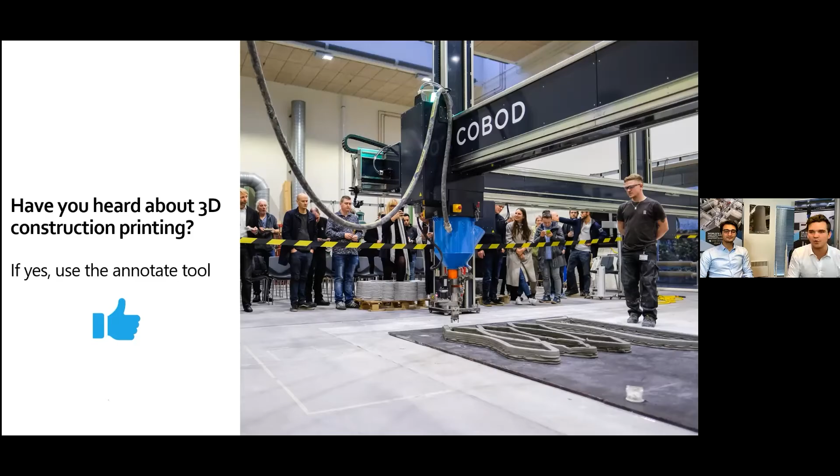Today we're going to show you more about how this technology is actually evolving. Before we get going, I would just like to show you a video of that. This is a project done by our partner, PERI Group. PERI is the minority investor, and they did this in Germany. Let's go.

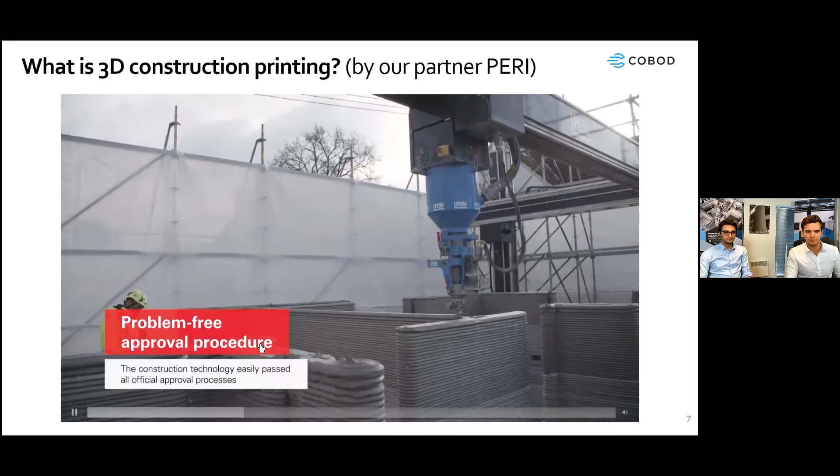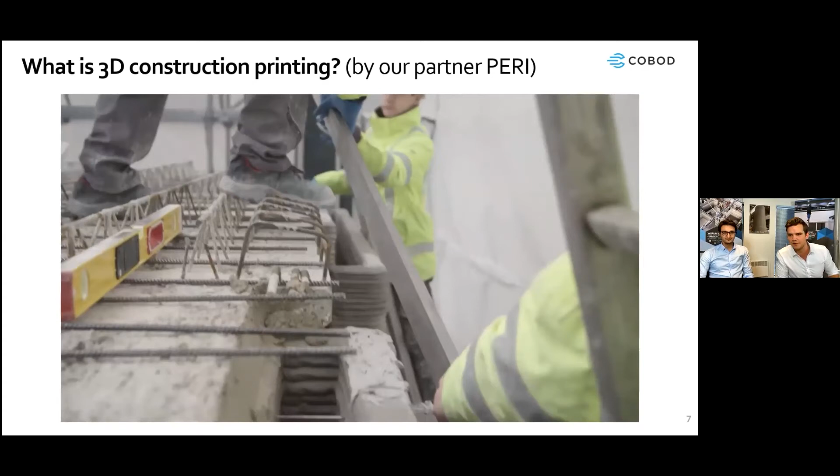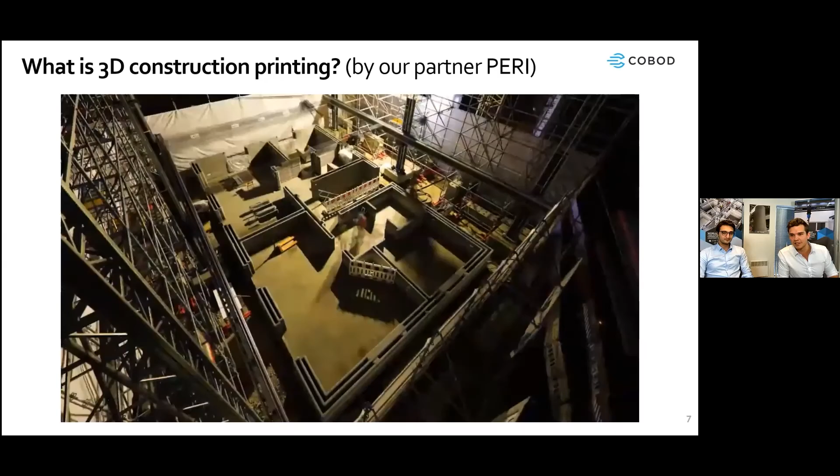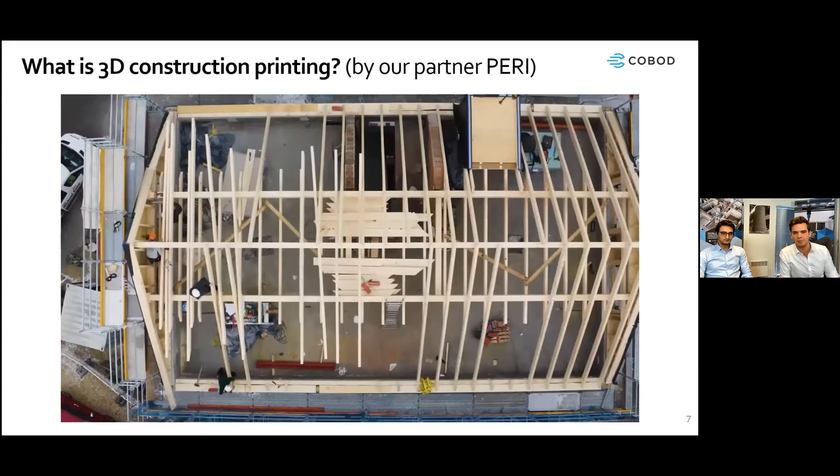I think we have some potential sound issues from the video here, so I'll just go ahead and voice it over. Again, what you're looking at is a very large building, around 400 square meters, that's around just over 4,000 square feet, being printed in Germany using a COBOD BOD2 3D printer. You can see here how the concrete is actually getting extruded through the print nozzle, which allows you to stack layers of concrete on top of each other to give you the walls of that building. And now here at the end, what you see is the additional contracting work that comes in to finalize the building. So a big thank you to PERI for sharing this video with us. Quite impressive, even for me who has worked here for a while now.

In terms of what 3D construction printing is being used for, there's a lot of use cases being developed these years, and I think we will only see more in the future. We've seen it used for residential housing, for schools, which we did - we'll see that in a moment - for wind turbines, also you'll see that in a moment. We've seen it used for bridges, in the military, for commercial use, etc. And we're just at the beginning of this story here. We will see many more applications being developed in the future.

Now, contrary to popular belief, 3D construction printing is not addressing all costs or all elements of traditional construction. That's what we've tried to highlight on the right-hand side. If we look at a residential housing project, best case, the 3D construction printing technology would make up maybe 45% of the total elements and total cost. You use around 10% for the foundation and slabs, then around a third for the raw house structure - that might be smaller than that. But then there's still a lot of other work which, as of now, you cannot do with a 3D construction printer. Maybe that will come in the future. At least that's something we're working on.

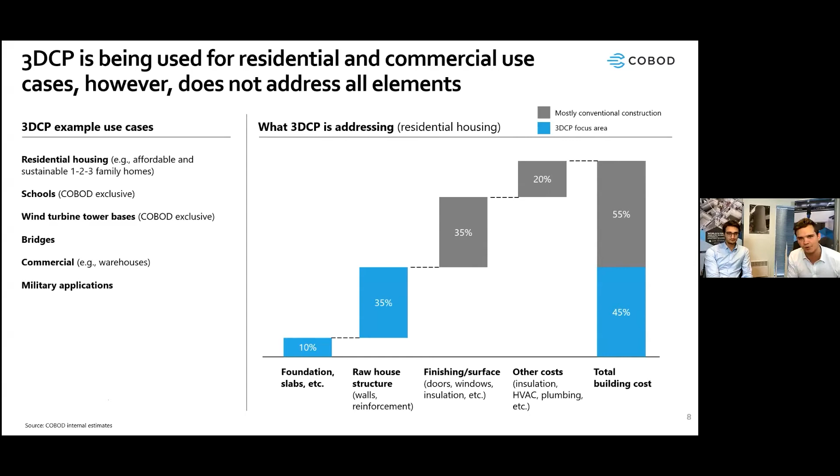So we always try to be very transparent here at COBOD in terms of setting expectations right. Now, just in terms of what's happening within 3D construction printing, well, it's growing a lot. I would say there are still no good global sales numbers that are trustworthy. We have ours, and we make up a very large chunk of the industry.

However, these are just numbers of companies — with regards to success, or how many have actually done proof of concept or deployed printers, the number is much, much lower. And in all humbleness, COBOD is likely the leader in that aspect. But strong growth here, and it'll only continue in the future. We're 100% certain of that.

Now, that was a bit about the status of 3D construction printing as it is right now. And I think we'd now like to switch gears to say, why are we actually seeing this? What are the benefits of 3D construction printing?

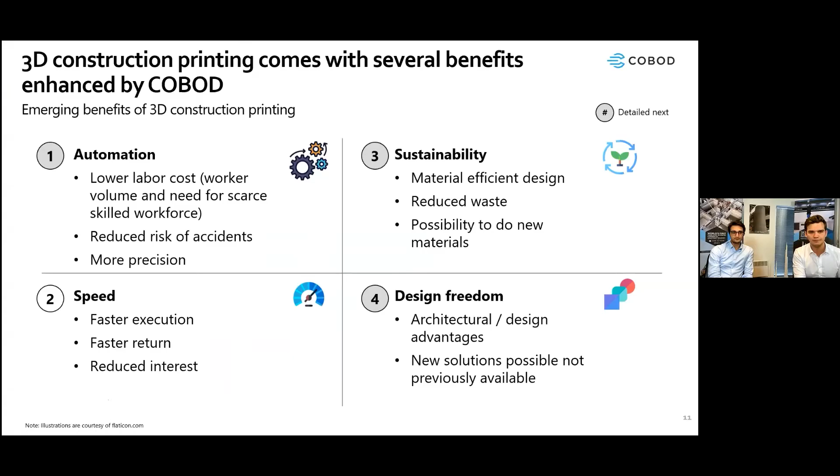In general, in the world, there is an urgent need for automating manual labor in the construction industry. There are several reasons for this, which you've likely stumbled upon in recent years, even if you're not in the construction industry. One is that the construction industry itself is not very digitized or automated. U.S. estimates say that around 50% of activities in conventional construction can actually be automated.

Secondly, there is a lack of skilled labor in the industry — we actually need good skilled hands on site, which automation, of course, can replace some of. Thirdly, there's been an increase in material prices for the industry. Steel and lumber are great examples of materials that have risen tremendously in recent years, which drives a further need to minimize cost.

And then number four, also very important, affordable housing. This is something we hear from at least half of all our customers — they want to do affordable and sustainable housing. So we see these four main drivers as reasons for why this technology now, despite having existed for several decades, is seeing a rise in adoption.

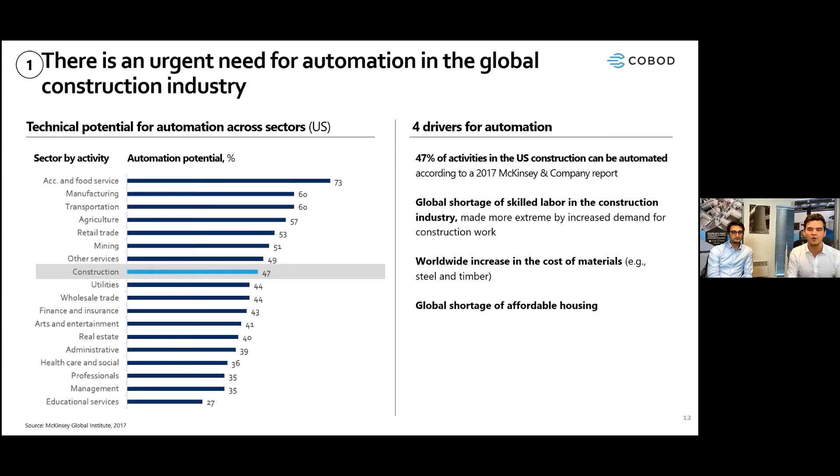Just speaking a bit more on the savings from 3D printing — maybe this is your domain, I'd say. Basically, because of the aspect of automation, using the 3D printer to automate the construction itself, the gain you have is complexity for almost no extra cost. So if you compare a flat wall with conventional construction versus 3D concrete printing, you end up with a factor of 1.

If you have a structure with one axis of curvature, you'd have a factor of 2. Of course, most of you are probably coming from a construction background, so you know the cost of a small curve would cost a lot in formwork, a lot in finishing, and so on — that doesn't happen with 3D printing. It's as simple as a digital file going to the 3D printer, and the printer does the work. The same case goes for a structure with two axes — of course, this is more complex.

And it's not about only the complexity, it's about finding the right people to actually do this. And because these people are also very exclusive and limited in their skills and time, that means there's kind of an extra margin or extra cost that's going to happen. Well, that doesn't really happen when you're using the technology of 3D concrete printing.

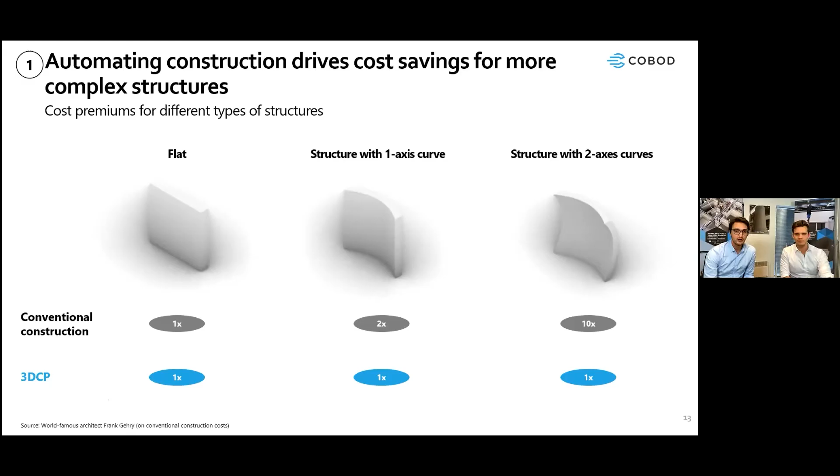So going on more into what happens in construction, why 3D printing is interesting, why it will improve sustainability. The first thing is you will have less waste, printing only what is needed without cutting or carving of precast elements. This is all that can be taken into consideration while 3D printing.

The same case goes with less reinforcement, eliminating reinforcement in precasted elements that you would use for transport. You have to have some kind of hoisting joists or hoisting points for the reinforced parts. All of that will disappear if you are using 3D printing in situ. And the material efficient design.

Let's zoom out on using this technology. If you are using a 3D printer, that means you can use construction in different ways that you were not allowed to do in conventional methods. This is what we're trying to do here at COBOD, creating knowledge, methods and technologies so that the engineers or architects who work with us change their mindset of how they design buildings. When they do so and activate the powers of this technology, we end up with material efficient designs. As you can see here, we achieved the same areas with different shapes.

By doing so, we reduced the structure by 12% in the use of materials. So again, this is a key point in the transition from conventional to automated construction: the mindset and knowledge that engineers and architects already have, and how they can put in the effort to optimize the use of 3D printing and efficiency in design.

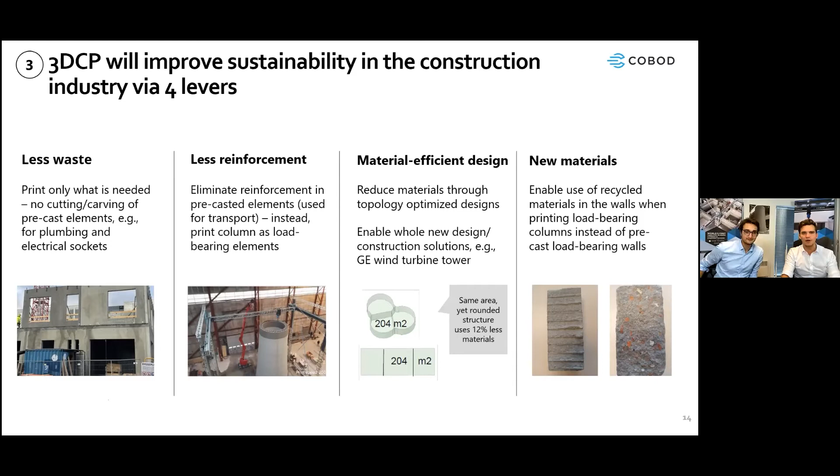So going back to the presentation, that was a bit on sustainability. And then lastly here, another advantage is, of course, the design freedom, right?

Exactly. As we talked about, this is a tool that architects, contractors, and civil engineers cannot, or maybe they're not educated, or let's say not practicing it as it should, because every contractor or architect, when drawing a line or doing anything, has in the back of his head: how are we going to do this, how are we going to achieve it, how much would it cost. And this is the thing we are trying to make all these people break free from this constraint of the box, so think outside of the box and have design freedom.

This is a very famous additive manufacturing case that happened at GE. Basically, this is a fuel jet nozzle; it sprays fuel into jet engines in airplanes. And as you all know, sometimes, and not sometimes, all the time in aviation, weight is money. So as you can see here, this jet fuel nozzle went from 20 parts to be assembled into one 3D printed part.

At that time, 3D printing or additive manufacturing was not as cost effective as using the small parts, but the weight reduction was 25%. So the main cost driver in the airline industry was actually the reduction of weight. You can see the effectiveness of additive manufacturing in this specific case with the GE fuel nozzle. And you can imagine this is one case of many that can take place, not only in manufacturing, but also in construction, engineering, and all different aspects of industry.

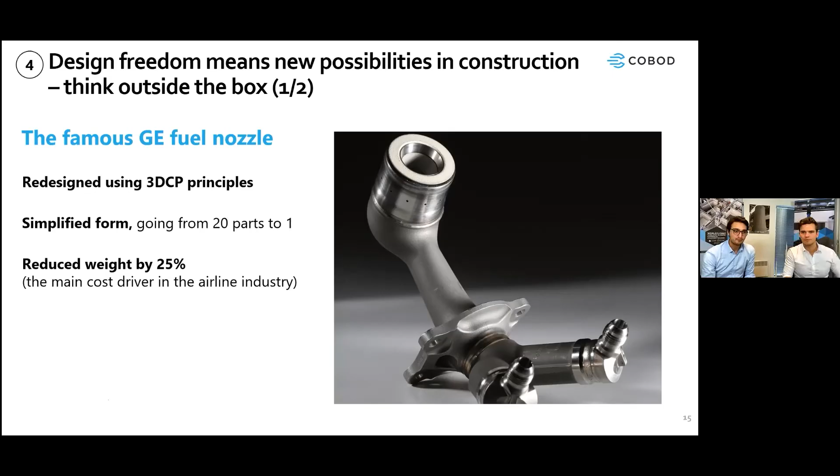Another example, this is a cool one. What happens if the architect or engineer wants to add some kind of aesthetics to the building? The printer is already there, the material is already there. What happens if we can actually do a weaving wall? And what is the cost of this compared to doing it in a conventional method?

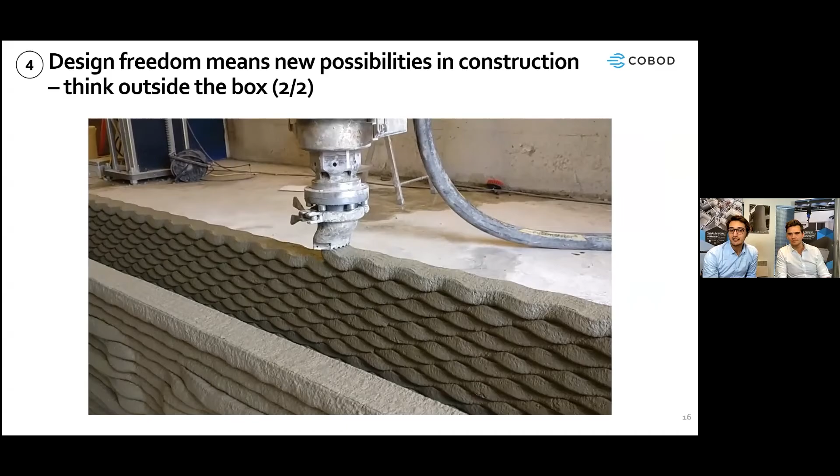Basically, it's extremely hard to do this with a conventional method—let's say if you want to make a mold for that. And that mold will only be used once, while if you have a 3D printer, you can do whatever you want, whenever you want. You can also imagine what happens if you design these patterns to also be load bearing, part of the construction, and so on. And all of this comes for free.

You can see here the consistency of the material, the smoothness of the printer itself, and so on. And on the wall in front, you can see we have our logo, COBOD, which is slightly recessed, appearing from the surface. This was made in 3 or 4 minutes using our own slicer, our own software. So the simplicity of doing these things, the design freedom, it's not just freedom in design, it's the ease of use. These designs were made by interns we had—you can imagine how simple it was to manufacture and do such a thing.

So again, this is where we are standing at the moment, and we're creating knowledge. We're trying to give people access to this knowledge and see how they can activate it and use these case uses in their own projects, in their own environment. So those are, I would say: design freedom, automation, speed, and sustainability. Those are the four main reasons we see for the increased adoption of 3D construction printing.

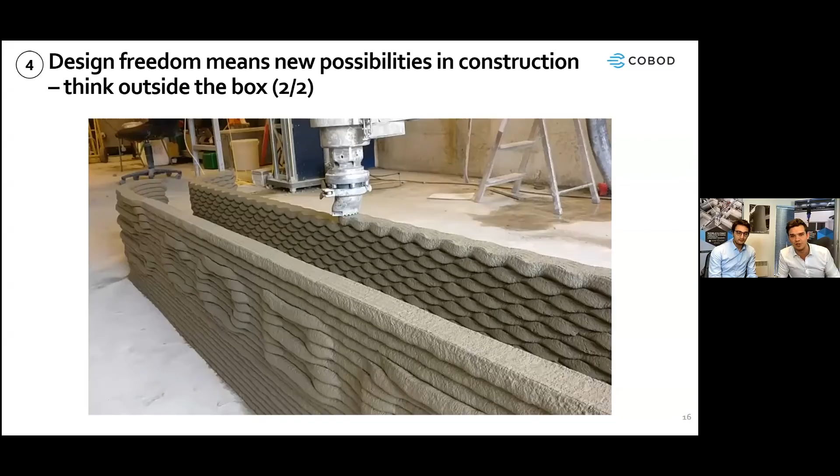Now, this is also very interesting: how do you actually do 3D construction printing?

A lot of pictures and photos have been going around the media with finalized prints for some companies. Some are real, some are maybe mock-ups. But we want to show you some real projects with real people living in real homes, and then discuss briefly how that was actually done.

So maybe you can take us through our printer setup here. As you can see, this is one of the setups of the printers. Let's start by introducing our printers - they are gantry systems, and as you can see, there are 3 axes where the printer can move.

Our printers are modular. When we say modular, that means it is adaptable to the size that you want. If we look at the printer we have on the x-axis, you can see 5 COBOD logos. Each one of these logos consists of a module. So basically this printer is 5 modules, which have a width of 12 meters.

You can deduct or increase that. The same case goes for the length on the y-axis. On the y-axis it's basically unlimited, because you can add more z-towers or z-legs that hold more y-axes, and go unlimited in that direction. On the height, we're at a certain point - right now we're limited to 8, 8.5 meters in height.

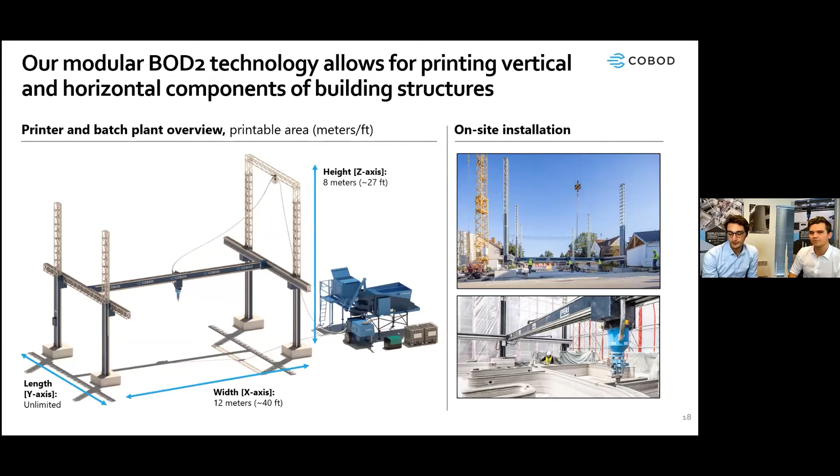On the right hand side, you can see the on-site installation. This was in the States, and another picture down there is one of the projects done in Germany, at PERI. If we go to the next slide.

So basically this is one of the examples of what happened - this is in Beckum in Germany, also by PERI Group. This is a high-end villa, with a touch of luxury, European luxury. It's around 160 square meters in 2 floors, and you can see the print time was around 36 days.

This project was actually one of the benchmarks in the industry, as it's reasonably sized compared to projects all around the world. It's around 1,700 square feet. Compared to other projects you've seen on the landscape, this is 2 floors, fully functional, fully permitted. It's a beautiful house - we asked a lot of people if they would like to live in a house like that, and more than 95 to 98% said yes.

But if you compare this project to other smaller 3D printed projects, of which there aren't many, you'd see this would win more votes than other projects because of the size, the technology, the looks, and of course a big credit goes to the hard work in Germany through permitting, the architect who designed it, the other contractors who did other trades, and German engineering in general. They're spot on - you can see this project was well done.

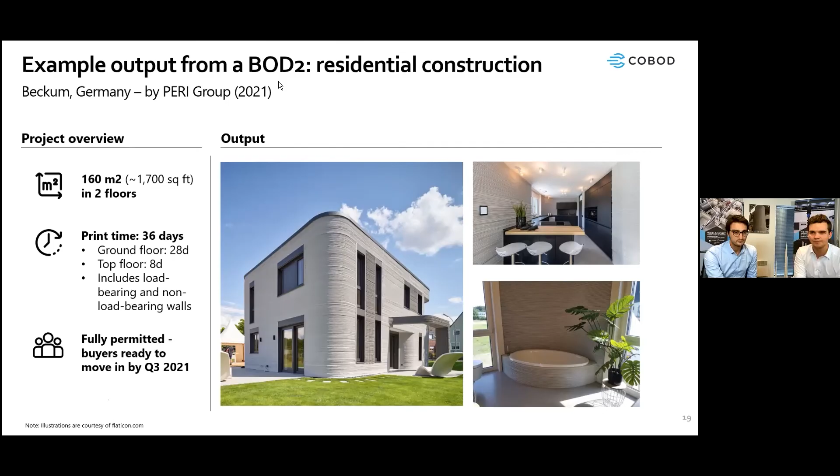Now we're going to jump to the next project. So 380 square meters, or just over 4,000 square feet - we more than doubled the size of the building by our partner PERI. And now it's in 3 floors, not 2, but it only took 21 days, not 36 like the one before. So jumping from one project to the next, an immense increase in production and construction efficiency.

Quite interesting to look at. And again, if you look at it, this is the second project. If you look at the third and fourth projects, which I believe will be out soon, you will see the reduction in print time even more.

This is basically what happens the first time you drive a car or ride a bicycle. This is an analogy that our CEO Henrik always uses in describing such a technology. This is something that also happens with the curve of experience - you know how to do things, you do it better, you do it faster, you do it cheaper, you do it efficiently. You actually know how to direct your contractors and decide how to do these things in a better way.

Again, it included load bearing walls and non-load bearing walls and so on. But the key factor here is the size. This is also something we in the industry always notice - the scale of the buildings you have compared to the time of the print. This is a really extreme good example of that.

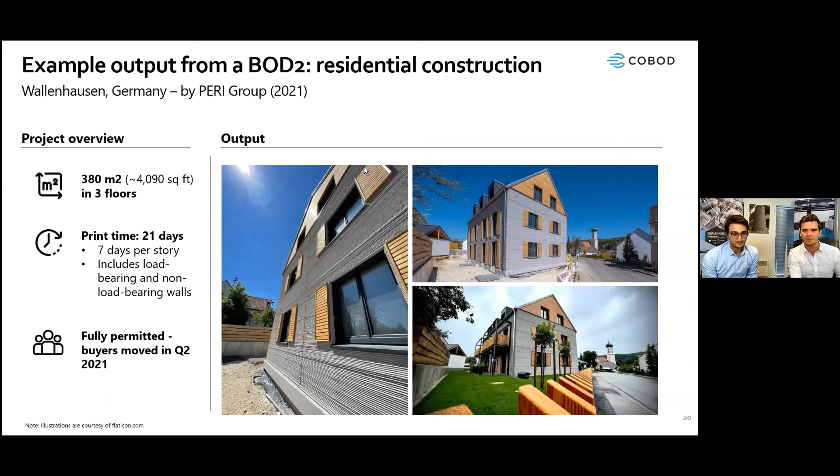These are two projects by our distributors in the States. We have Alquist 3D - they're printing in Virginia, finishing up that home - and then Printed Farms in Florida, also printing over there. So again, our technology is deployed all over the world in different temperatures, different humidities, with different building regulation codes, etc. Very, very versatile technology being developed here.

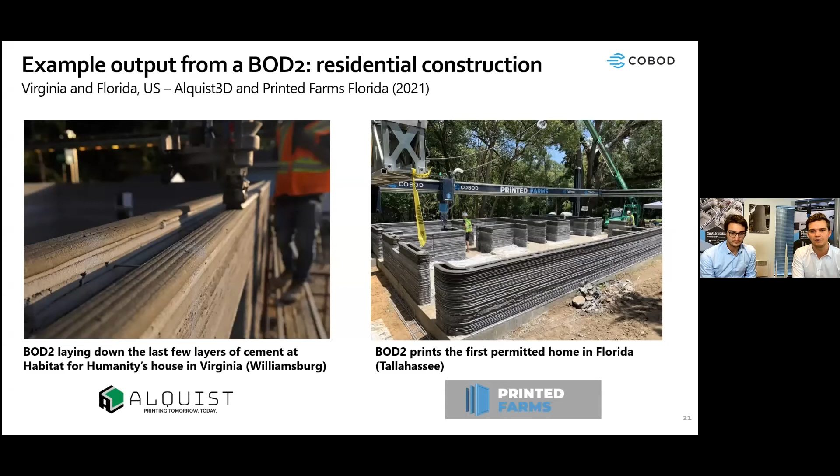And it can be used for other purposes than just residential housing. So Holcim here - Holcim is the world's largest cement and concrete supplier in the world - and they have a joint venture called 14 Trees. They actually printed a school in Africa, in Malawi, and did so in only 18 hours.

It's just a very, very cool use case. You can see the kids are in there, they're happy - I guess they're happy. I wasn't too happy going to school back then, but they look happy at least. It's just a fascinating use of that technology.

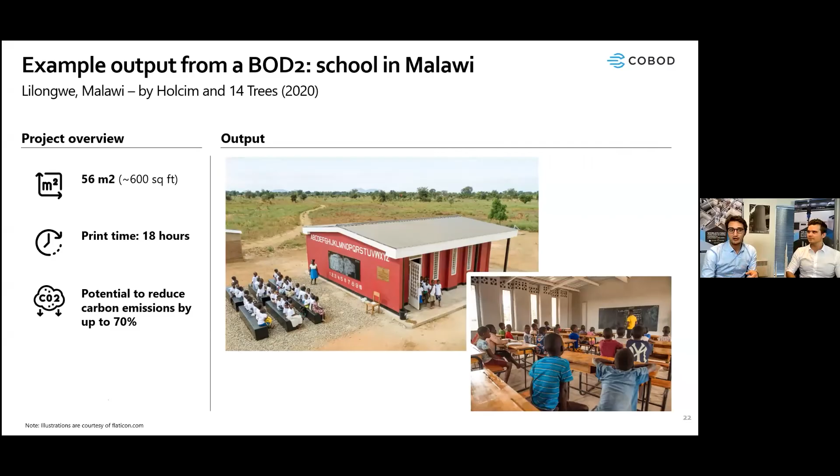Maybe it's worth saying that the technology itself is such a tool that you can actually control the level of finish, or control what kind of product you want as a building. So you can go with baseline, basic, low-end projects like what happens here in the school, and then compare it to the luxury end of houses like what you saw in Germany. So basically this is determined by the designer and the engineer and the way you implement the technology. This is a very important point to show.

That also goes for the next project, which is our collaboration with General Electric Renewable Energy. We're developing with them wind turbine tower bases.

The idea is that on site, for onshore wind turbines, you would print these tower bases on which you'd stack your regular wind turbine. Wind turbines generate electricity, and the higher you are in the air, the more electricity is produced. However, onshore wind turbines max out at around 100 meters because to increase the height further, you'd need to increase the width or diameter of the base. That's not possible because the flatbed trucks that transport these elements can't handle it—the roads aren't big enough. Instead, you can circumvent this by 3D printing the tower base on site and stacking a regular sized turbine on top to generate electrical output.

This example here is 10 meters, or just over 30 feet. It took 3 weeks—that was in 2019. We did it less than a year later in just 3 days. So we went from 3 weeks to 3 days, using more than 100 tons of concrete. This was the first time; the second time we did it, more than 50 to 100% additional concrete was used per day. Immense increases in efficiency.

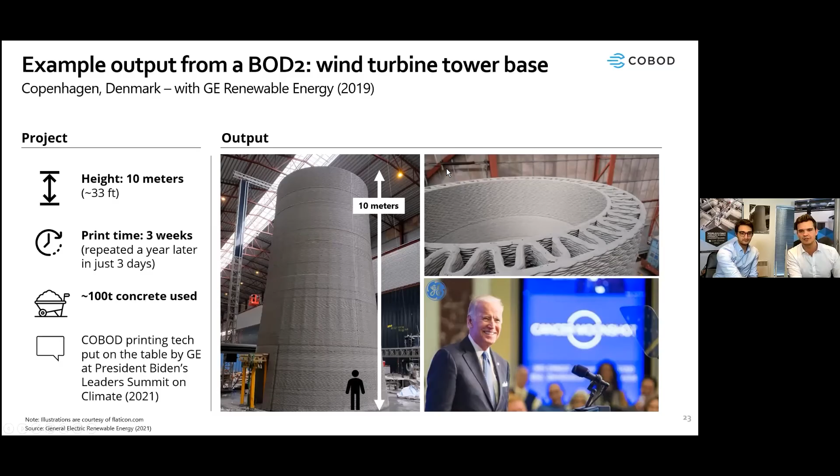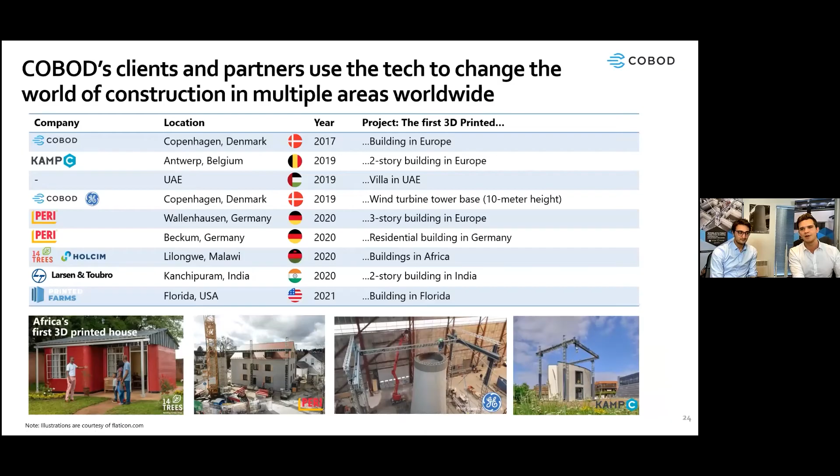A lot of world's firsts around the globe. Again, 30 plus printers sold—they've been used to do the first 2, 3, and 1-story building in Europe, wind turbine tower bases, affordable housing in Africa, schools, housing in the States, et cetera. A lot of great things going on.

Here's an overview of where we've sold these printers. As a matter of fact, we're opening up 3 new offices in the new year because we're growing so much—for the Middle East, for Asia, and for North and Latin America. So you'll be moving to Dubai, and I'll be moving to Florida next year. Really looking forward to that.

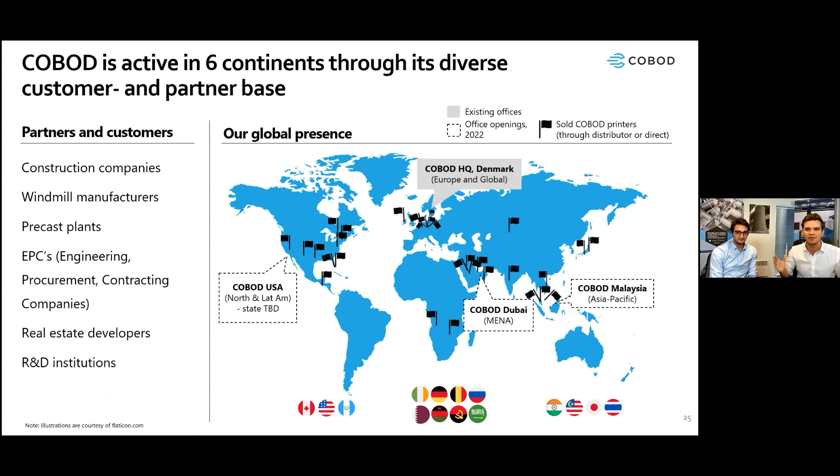That brings us closer to our customers, new and existing ones. Really excited about the breadth of our customer base, as you see on the left-hand side.

So maybe you're the architect expert here—I don't understand it really, but can you take us through how we go from initial drawing to the finalized print? I'd encourage all architects and engineers involved in this kind of technology who want to design buildings.

They have to understand the technology better—what can the printer do, how we can do it. The thing as well is not to limit yourself to imitating what you'd normally do using the 3D printer—it's more about how you optimize the design. So basically, you'd sketch initial drawings for conventional construction, then see how you can adapt it to the 3D printer.

Then you convert your CAD files and insert them into the slicer application. The slicer application we provide to our clients is a translation tool that translates normal CAD drawings into G-code. There are different methods to create G-code with different software, but because of our wide global client base and many people with limited background in new software, we created tools to move on with the existing infrastructure—that's why we created the slicer.

After that you create a G-code, load it into the printer, install the 3D printer, and print on site using the material feed system—which is the concrete—to print the foundations, walls, potentially slabs and roofs, and so on.

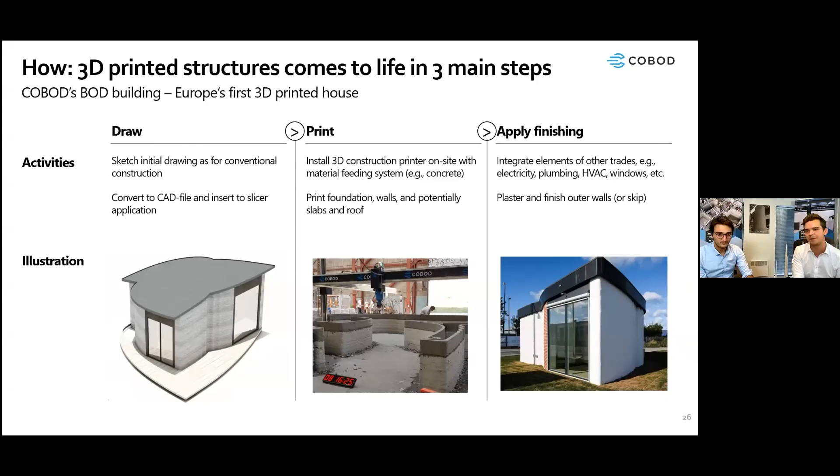Now we'll quickly jump through the future of 3D construction printing. The overall message I want you to get is that it's bright, and we will only see more use cases, more efficiency, and increased adoption coming in the future.

Basically, what we see is that we're moving onto a new S-curve of technology.

In conventional construction, automation has not happened a lot in recent years. However, we believe 3D construction printing will actually take us onto a new curve of automation, which will come with a lot of benefits, those that we went over before.

Now we think there are three drivers that will take us there even further. One, improvements in technology—it's going to be more reliable, and we'll increase the speed, improve the material, and so on.

Also, we will see new features being deployed. We're working on a lot of features internally, which we'll gladly tell you more about in the future—something we'll launch next year. It'll essentially take our printers from being just printers to fully fledged construction robots. So a lot of exciting R&D happening on our end together with our broad partner base.

The second driver of increased adoption is, of course, increased scale. Right now we're already at 3 floors—we can print up to three floors, which is a lot more than any competitor if you look at actually completed projects. However, next year we're going to go even bigger, a lot bigger, and we're very excited to tell you more about that in a future episode.

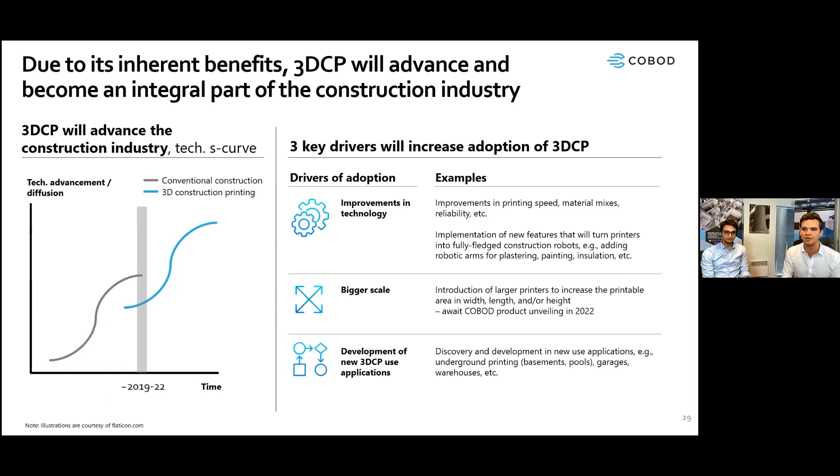And thirdly, as a driver of adoption, we're going to see new use cases being deployed. Can you print underground? Can you do warehouses, garages, etc.? All of these are being discovered and developed as we speak, and we're happy to drive that transition.